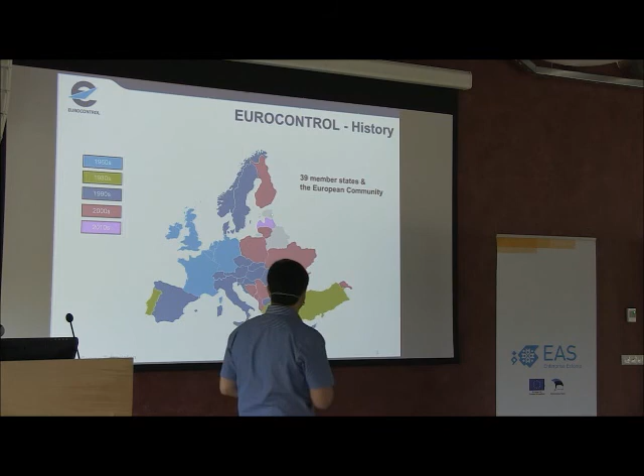Another picture to give you an idea about Eurocontrol: it's a civil-military organization whose objective is mainly to manage or build the European single sky. This was the main objective, but today Eurocontrol is doing more than that.

I wanted to show that we are not only concentrated on Europe, but also on pan-European relations, like with Turkey, Ukraine, and Norway. And again, I hope Estonia will join in the near future. The good news is that this month there is a discussion started between Eurocontrol and the Estonian government, so that Estonia also joins Eurocontrol.

As I said before, my task is to keep you awake for the next hour. We will start with a video showing the traffic in Europe, keeping in mind that this is a 2006 video, and that this is just one day's traffic. We will start at 2 in the morning, so this is the situation at 2am over Europe, and you will see that the traffic will increase to reach 30,000 flights during the day.

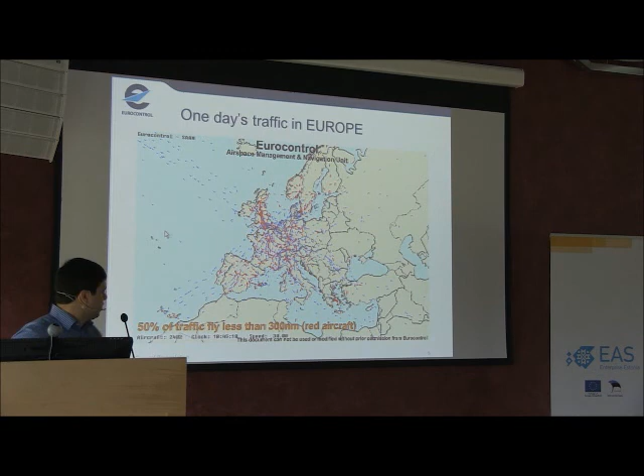We are almost at 8 at night, so the traffic will decrease, and we reached the peak at 3 in the afternoon.

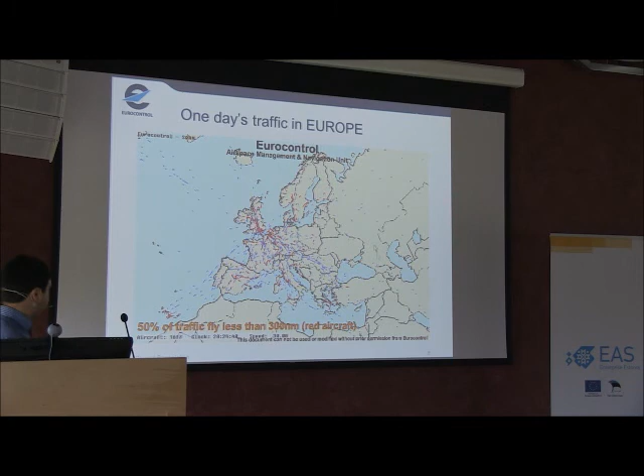As I have just said, the big challenge is that we think the traffic will double by 2030. So for capacity, there is a big challenge to handle the traffic. With the increase of traffic, we should keep safety as our main objective.

The third thing is that the environment is very important in all of this, and it's not only political - we should take into account the environment with the increase of traffic. We need to reduce the cost of air traffic in Europe. As many of you know, in Europe the cost is very high compared to our colleagues in the US.

And we have to work on the fragmentation of the airspace. I will come back to this point later on. With all of this, there is a big need for improving the technology and also the interoperability, because what we have today in Europe is that we have big manufacturers not talking to each other, and when an ANSP buys a system, sometimes they are obliged to buy a big system that cannot be connected to other systems because of the interoperability problem.

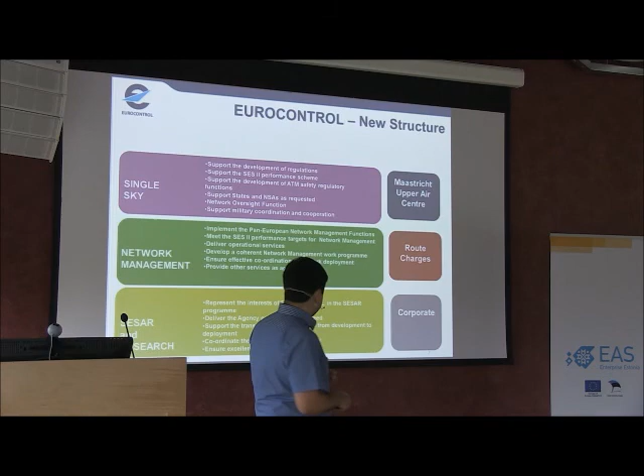So it's an interesting domain for investors in the industry to enter this sector.

How we are working with the European Commission and EASA: the European Commission and EASA are responsible for the regulation with the ANSPs, and we provide technical support and expertise for them as experts in air traffic management. The second role is the network management - maybe you heard about the CFMU and the regulations that we manage in Europe, this is the role of network management. And the third pillar is the research program, short, medium, and long-term research.

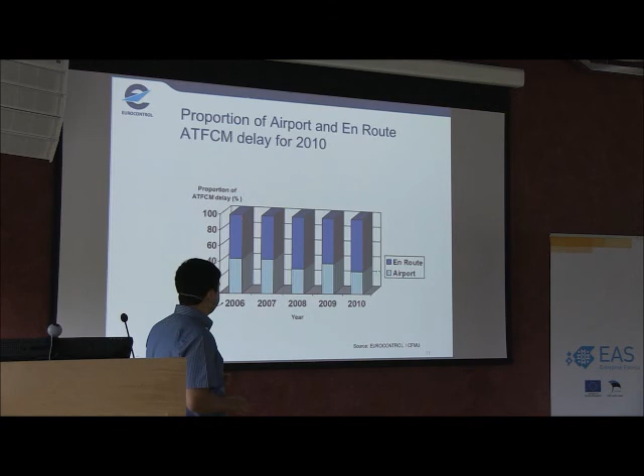If we go in depth and speak about the airport and its relation to the network, you can see from this slide that the airport generates a lot of delays. And when we speak about delays, we speak about loss of money for companies. This is the area where we should enhance our work, to decrease the delays in the airport.

Unfortunately, the main issue in delays is the weather. The weather is responsible for about 45% to 50% of the delays in airports. But new technology should allow us to work even in bad conditions, so there is an area where we can work a lot in terms of systems.

The capacity - there is a problem of the demand and what we can provide as a service. So the capacity of the airport is related also to the runway and the configuration. We cannot provide as many slots as we want, and there are other problems related to staffing, etc.

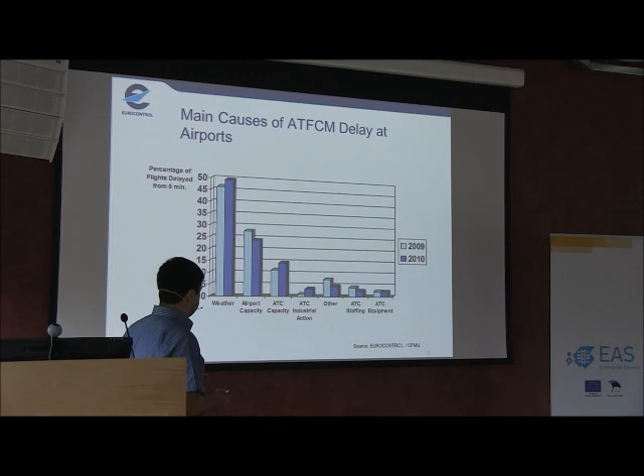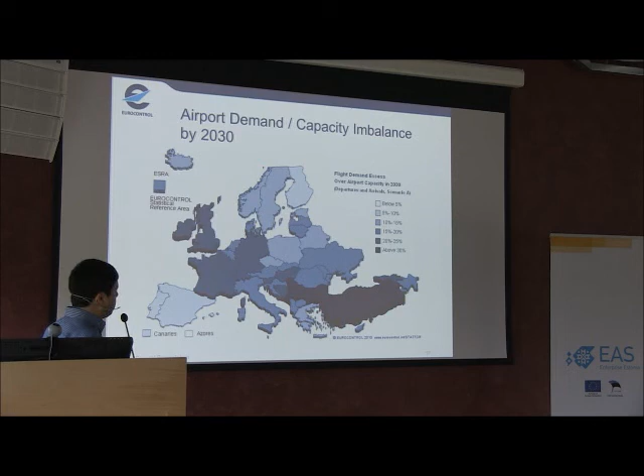I spoke about the capacity and the demand. Here is our forecast for 2030 about the demand. You can see that with the current configuration, we will not be able to handle all the demand for the traffic, especially in areas like Germany, France, England, Turkey, where the demand will be 30% above the capacity.

So what we did at Eurocontrol is analyze the different parameters. Where can we improve ourselves? Here is how we stated the problem.

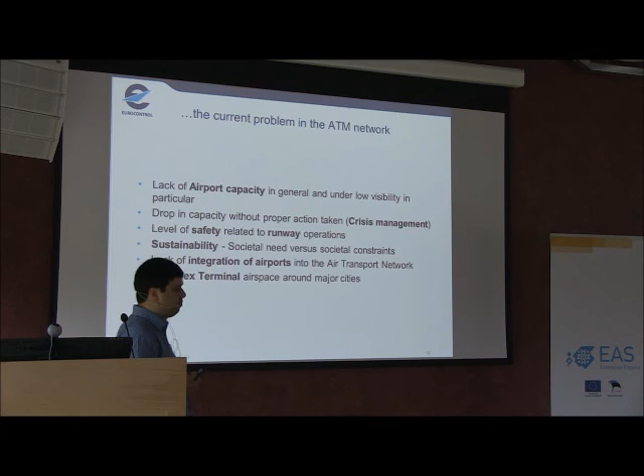We know that we have a lack of airport capacity, as I just shown before. We know that there are problems in crisis management, as you remember a few years ago with the volcanic ash. Some parts of Europe showed that there is no real crisis management procedure in some places. The level of safety related to runway operation, we should keep the safety very high. Sustainability related to societal need versus societal constraints.

This is one of the main problems that we have: the lack of integration of airport into the network. Because a few years ago, when you spoke about air traffic management, you spoke about approach, en route, but not about airport. The airport is like a black box. Aircraft arrive and depart from the airport, but it's not considered part of the network. This is also because the economic model for the airport is different from en route and approach.

And at the airport we have two contradictions: the company wants passengers to leave the airport very quickly to keep flights on time. At the same time, we have the airport people, who want to keep the passenger as long as they can so they buy things from the airport shops. So it's very difficult to have a balance between those two big actors.

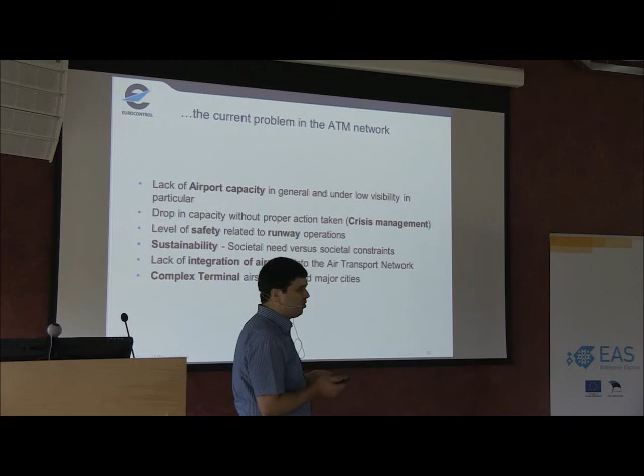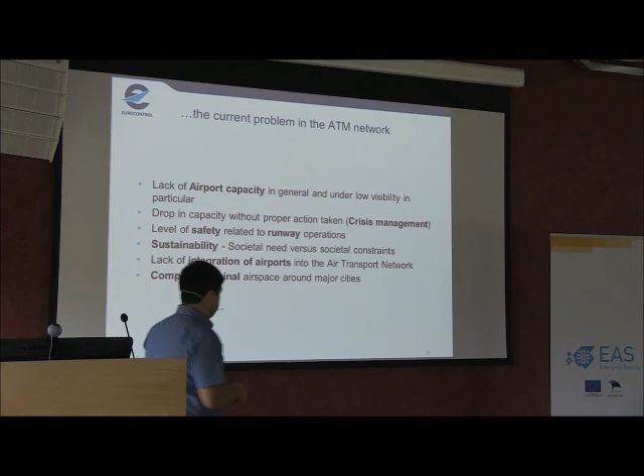And the last point is about the complexity of the airspace and its connection to the terminal. So you will see what we did at Eurocontrol to handle some of these points.

So for the organization, the first act is about planning. This is an area where not a lot has been done in recent years, and the concentration on collaborative planning is something really new. In Europe, there are just 3 airports which have real planning for the whole airport, and from those 3 airports, just 1 or 2 are really doing this work.

What I mean by collaborative airport planning is the fact that before the aircraft arrives at the airport, the ground handlers know that the aircraft will arrive. The controller knows when the aircraft will land, and this information should be shared between all the actors.

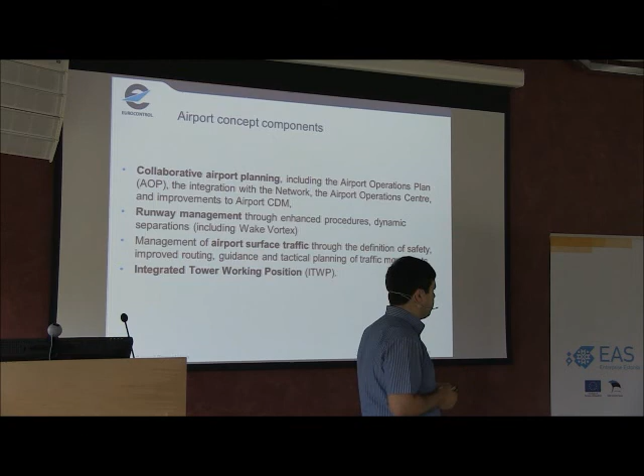Today, this collaborative work doesn't exist in all airports, and if it exists, it's not coherent at the European level. So our answer to this problem is what we call AOP, Airport Operations Plan, to integrate the airport into the network so we can all share the same information and improve the current collaborative decision making.

What I want with this presentation is to present the operational need, but also where the industry can intervene. In this particular point, for example, there are industrials trying to help operations put systems in place at airports to do this, but not in all airports in Europe.

There is Roissy Charles de Gaulle, Heathrow, Munich Airport, and Zurich. They have already done a lot of work on this, but all the other airports, it's in progress, or maybe not even started.

The second point is about runway management. I will speak a little bit about this problem, because today, if there is something where there are a lot of things to be done, it's in that area of runway management, to detect vortices, to help the controller know how to space the aircraft.

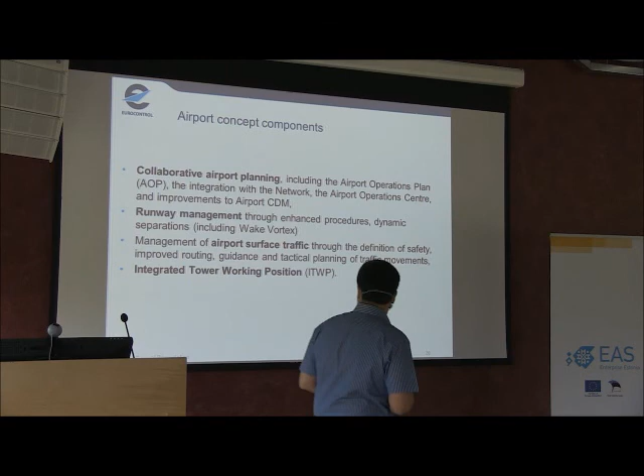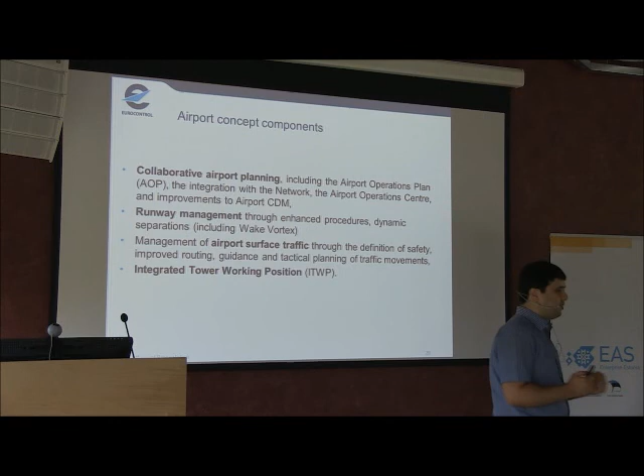The third point is surface management. What we provide to the controller in big airports today is a radar situation, so he sees the aircraft moving on the airport, but he cannot see what route the aircraft will follow, and he cannot compare what's planned with what's executed. So this is the current situation. I will speak a little bit about our proposal to improve this.

And finally, the integrated tower working position. I'll show some photos of new airports in Europe, how they are.

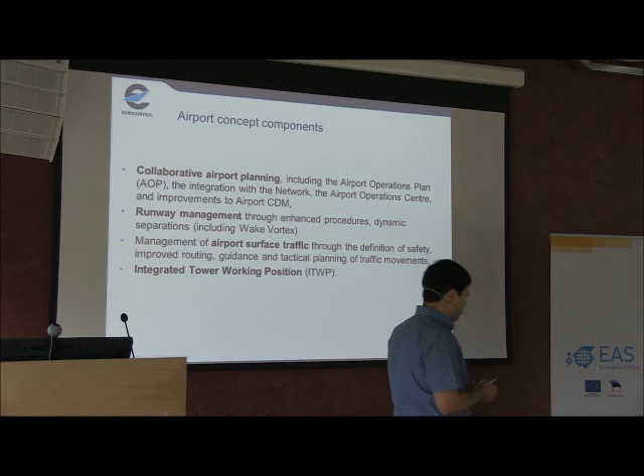So regarding the AOP, the airport plan, what we want, as I said, is to integrate the airport into the whole network. This starts with planification at the airport, which will be shared with the network, and then there is a mixture of all the information distributed to all the actors.

So what we are waiting for from the industrial side is to put systems in airports which enable the airport to share information. It can be easy to say, but it has a lot of impact on the airport because the complexity of each airport is different from the other. All the airports are not the same in Europe, and for each airport there is a specific case.

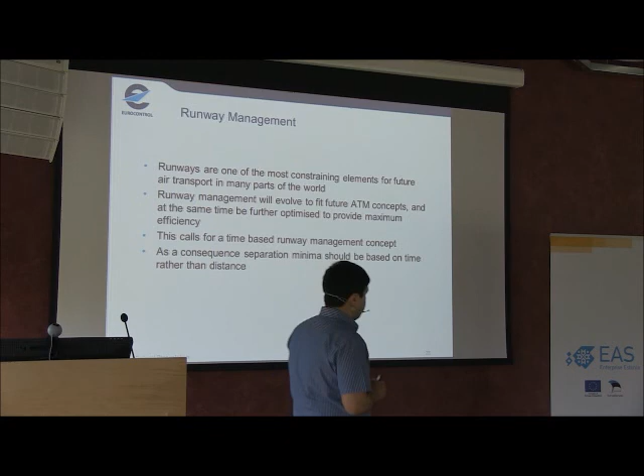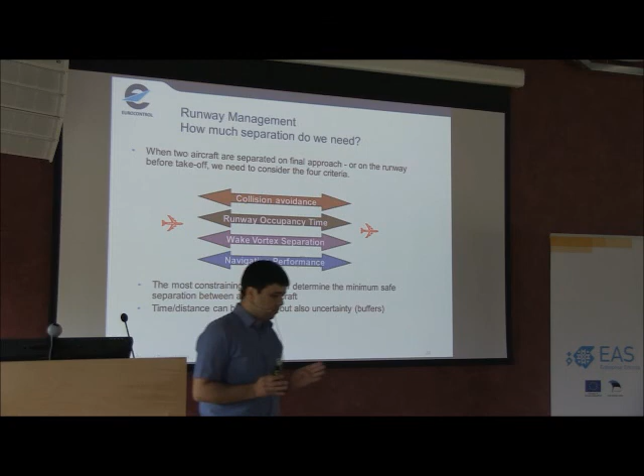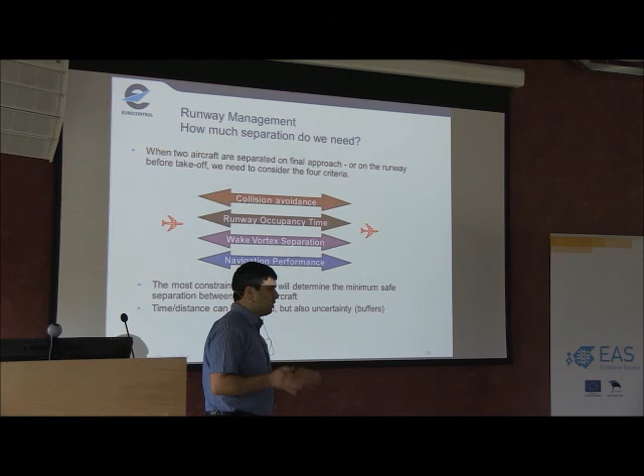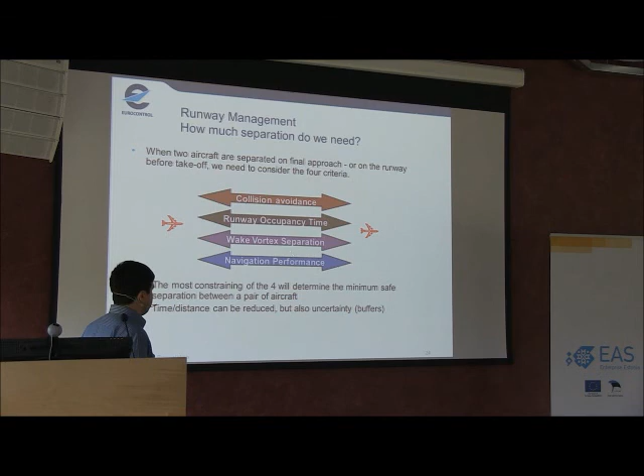Okay, for the runway, how are we managing the runway today. There are 4 criteria to take into account to compute how much distance should be kept between each aircraft, and the most constraining of the 4 criteria will determine the minimum safe distance to be kept. So the time distance can be reduced, but also the uncertainty buffers. And for each of those 4 criteria, we need some system to help the controller.

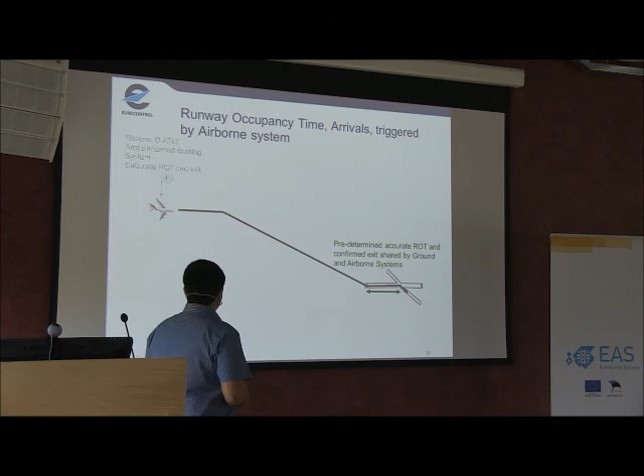I'll go to the next one to show you this. What we want to know today is how much the aircraft will occupy the runway, the time that will be spent on the runway, to synchronize the traffic. What we are proposing today is that the aircraft itself informs the controller about the time it will occupy the runway.

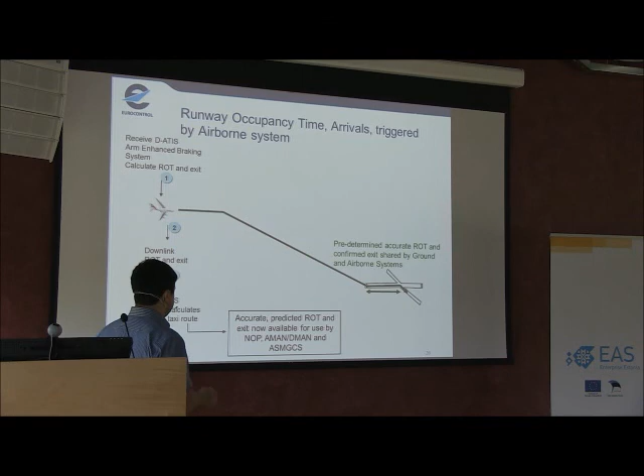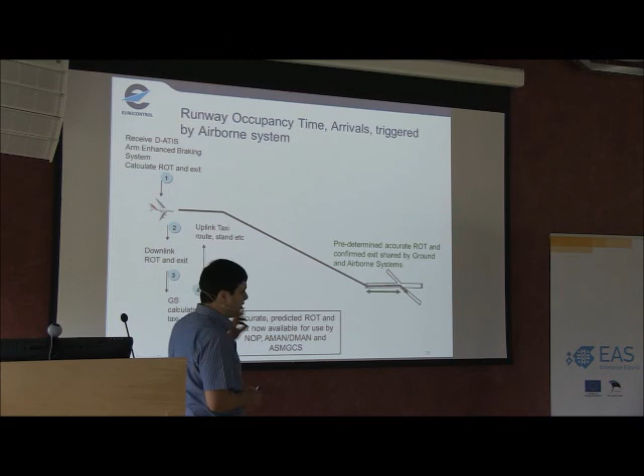Once the aircraft sends us this information via data link, the ground system computes the taxi routing. From this information, we can fix the route that the aircraft will follow on the airport, and the information is uplinked to the aircraft. Here, I'm not speaking about the system which exists. I'm speaking about what we think should be done in the future to be able to handle occupancy time on runways very, very efficiently.

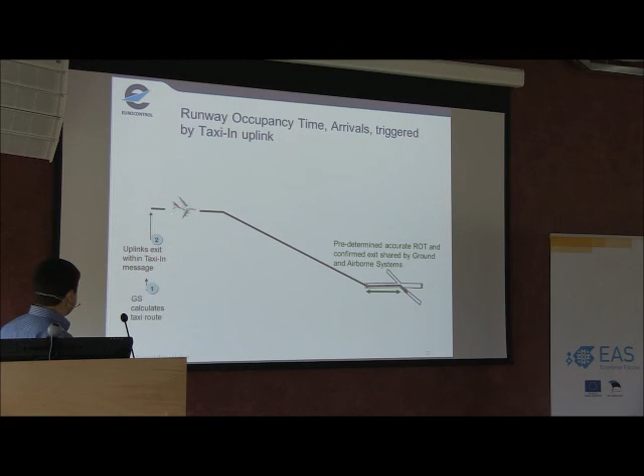I see that by this half hour, half of you is sleeping now. The second way is that we think we can compute the taxi routing on the ground, sending this via data link to the aircraft, which computes the occupancy time on the runway, sends us back the information about how much it will occupy the runway, and then we fix the sequence.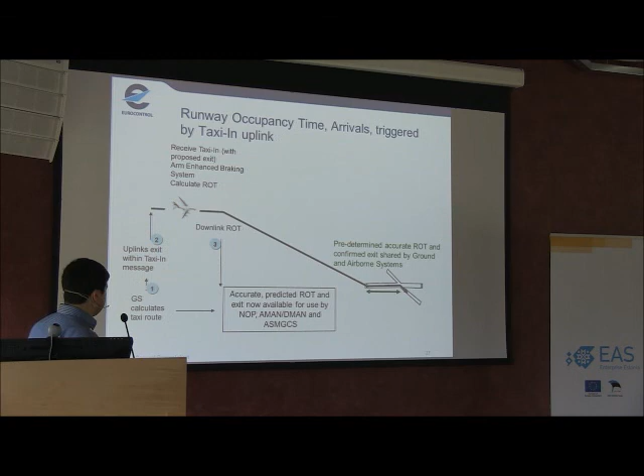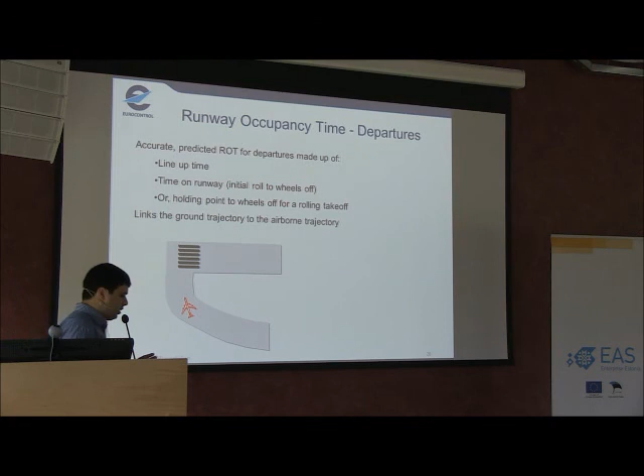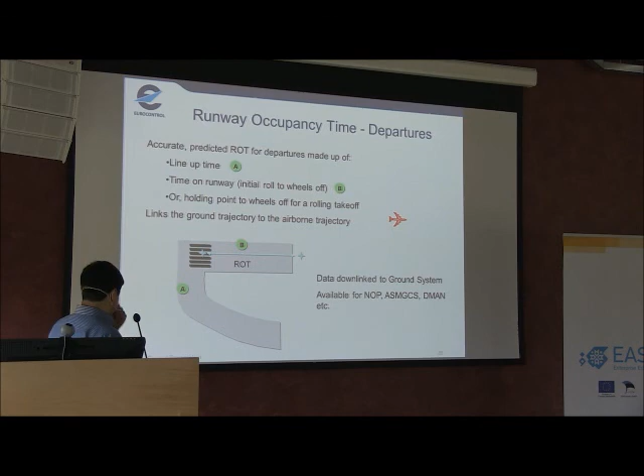As I'm speaking today, we can detect the vortices, but we cannot inform the controller of how much space he should keep between aircraft so that the second aircraft is kept safe. So the problem in this case is that we put a big buffer around the separation. We lose time on the occupancy of the runway, and of course when we lose time, we lose money. So this is also an area where a lot can be done, because today there is no way to inform the controller how much space he should keep between aircraft in this case.

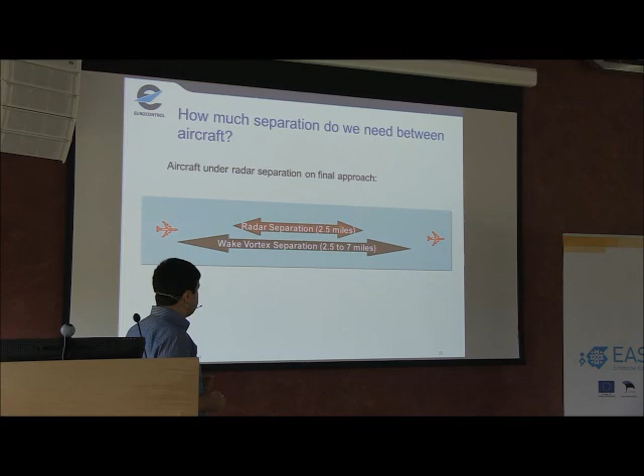So for radar, separation is 2.5 miles, but with wake vortices it can go up to 7 miles. The way forward, we are working on this problem of wake vortices, but what we are expecting from the industry is to provide the airport user, the controller, new tools that allow them to decrease the separation between aircraft. If there are wake vortices, we should not keep a big buffer, but the exact buffer needed to keep the second aircraft safe.

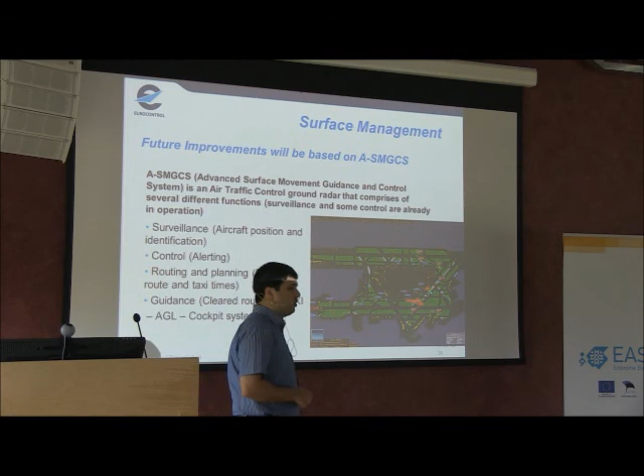In the domain of surface management, there are many other tools that can be developed also to help the controller. What we have today is just what we call ASMGCS, Advanced Surface Movement Guidance and Control System, which is just a radar picture of the situation. So what we are proposing to be developed in the future is the ability to provide the controller with the possibility to view the optimum route to the runway. A routing server is something we think will be very important in the future, and which doesn't exist today in a modern tower.

In this picture, what I'm showing is a mock-up that we are working on at Eurocontrol.

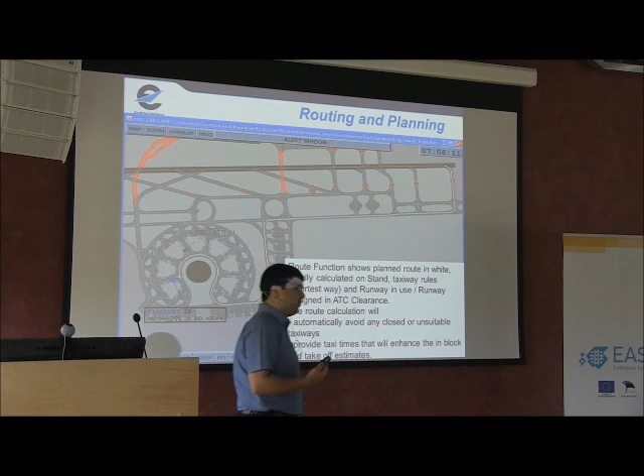This mock-up, the purpose is to show the idea, and then we think that the industry can take this idea, these mock-ups, to build the real systems. In this case, we show some proposal for the routing server.

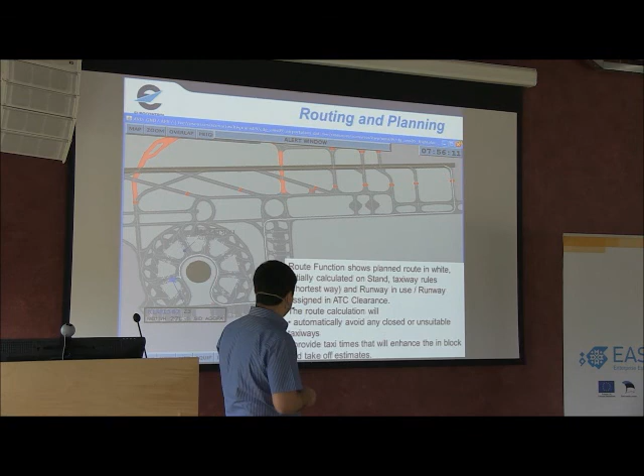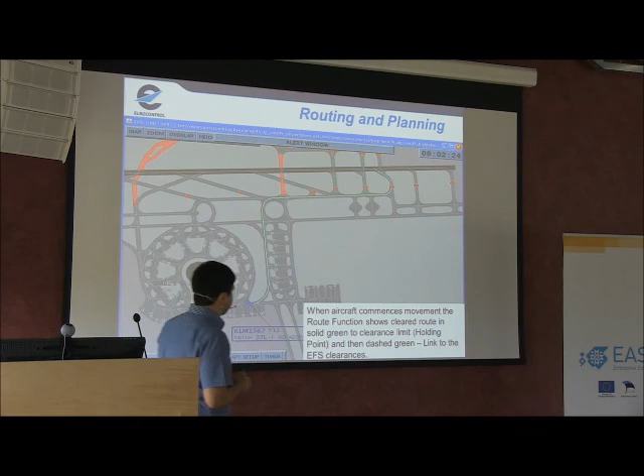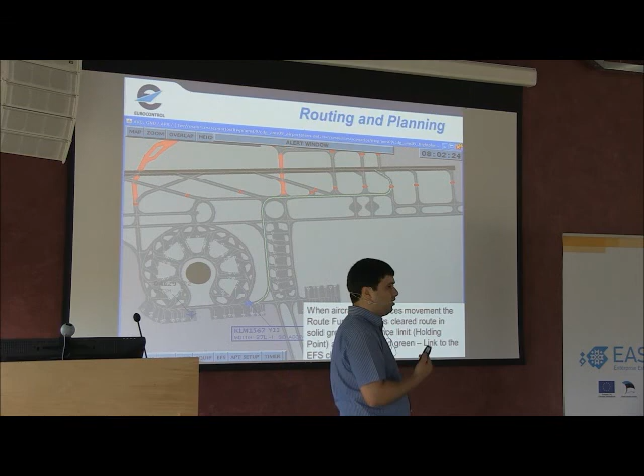This first picture is what the controller has planned in white, and in green it's what the controller has cleared, which is different from the first one. So the system can show to the controller the difference between what was planned and what he has cleared. You'll see why it's very important in terms of safety.

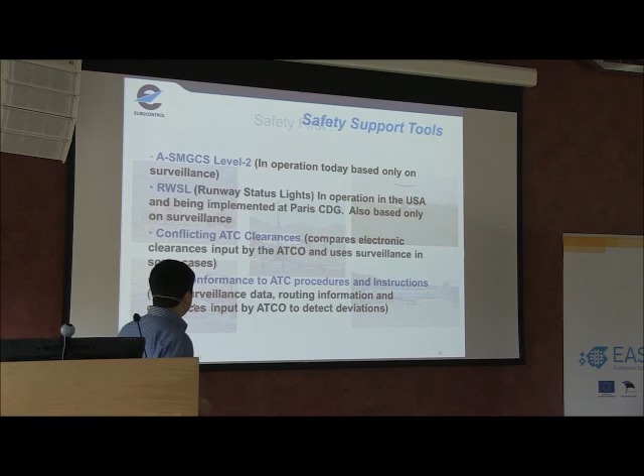This is more surprising because this is a taxi, so normally there should be no problem on taxiing, but the British Airways missed even the taxi. So what we did also is that we analyzed all the different situations that can bring us safety problems, and we addressed some proposals for enhancement of the safety tools that the controllers have today.

This A-SMGCS level 2 is in operation today, but we think that level 3 and level 4 should be implemented, taking into account new systems like the runway status light. This is a system that exists in the US. We started some tests in Roissy Charles de Gaulle, but not in all the other European airports.

This is the kind of system that will help the pilot know the status of the runway when he approaches, either from approach or when he's taxiing. So he sees the light in front of him. If it's red, he should not continue. Even if the controller gives him clearance to continue, he will check with the controller: are you sure it's red in front of me?

The third proposal is about conflicting ATC clearances. Today, the controller can give two opposite clearances, but nothing in front of him shows that there is a problem with his clearance. So he can give landing clearance for an aircraft and at the same time a cross-runway clearance. This happens very often, but the system today doesn't show him that he made a wrong clearance, or at least he should confirm that this is really what he wants to do.

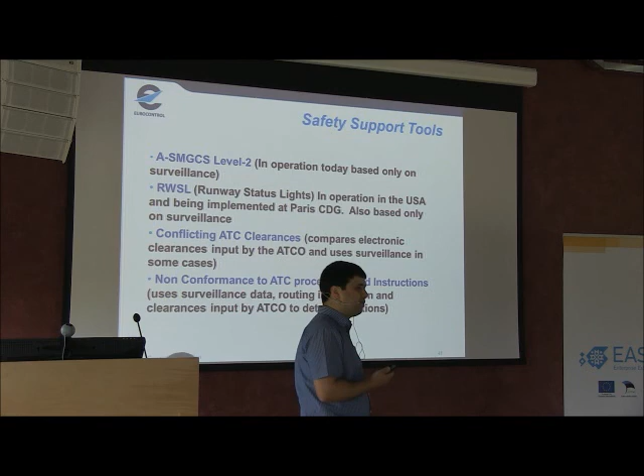So we analyzed all the clearances given by the controller, and we came up with a proposal for how the system should behave to help the controller on this. The fourth proposal is to help take into account the routing of the aircraft, to show the controller the non-conformance, either to ATC procedure—the pilot didn't respect the procedure—or to the instruction, the clearance. So here are some slides about what we are proposing as support tools to the controller.

Again, this is just a mock-up, it's not a system which is operational. This is what we are proposing for the community. What we are expecting is that the industry will take these ideas, develop them, build real systems, and then sell them to the towers, or to the ANSP, or to any organization responsible for the airport.

This is the example of the runway status light. Once KLM starts the takeoff, Crosshair sees the light red in front of him. Crosshair is lining up on this runway. He can see the red light, so he will never start his takeoff before this red light becomes green.

It can be surprising, but in this runway, in this configuration, we had 20 people die 10 years ago because such a system doesn't exist. What happened with the Spanish aircraft, it was on this Kilo 6. The controller asked him to line up, and there was another aircraft sitting here.

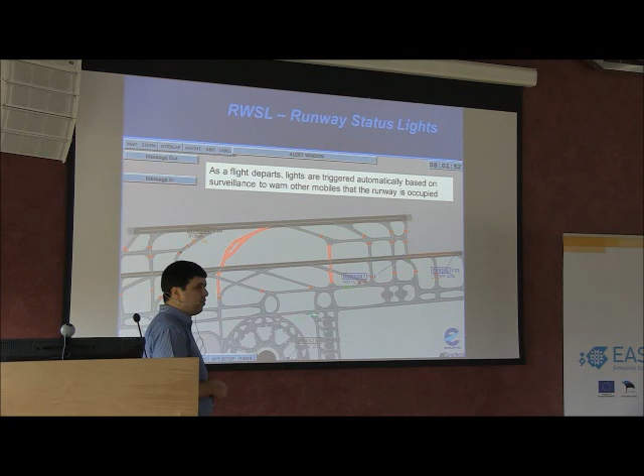The controller gave takeoff clearance. The guy here thought that the takeoff was for him, and the Spanish pilot thought the takeoff was for him. Then the big aircraft hit the small one on the runway in Roissy Charles de Gaulle. So based on problems like this, we analyzed what we need on the system side to help the controller.

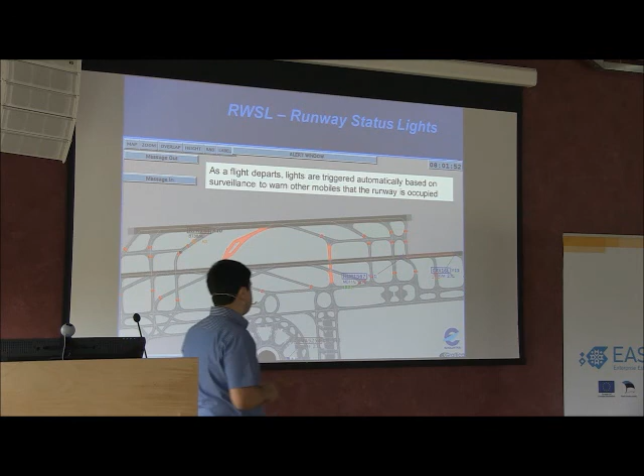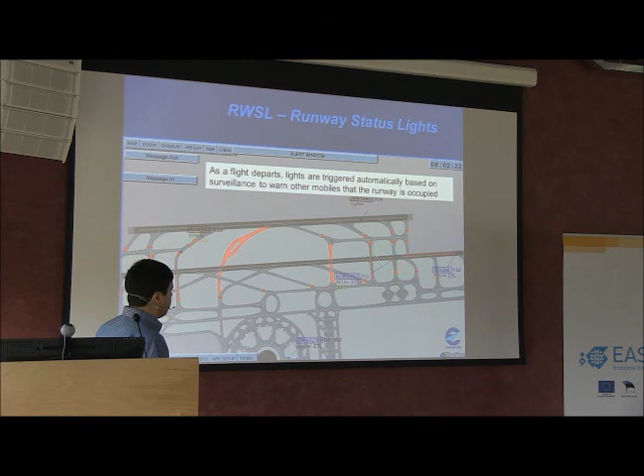Just 5 minutes left, so I'll go quickly. This is to show also the system of runway status light, so that we put red lights around the runway, so the aircraft will not enter.

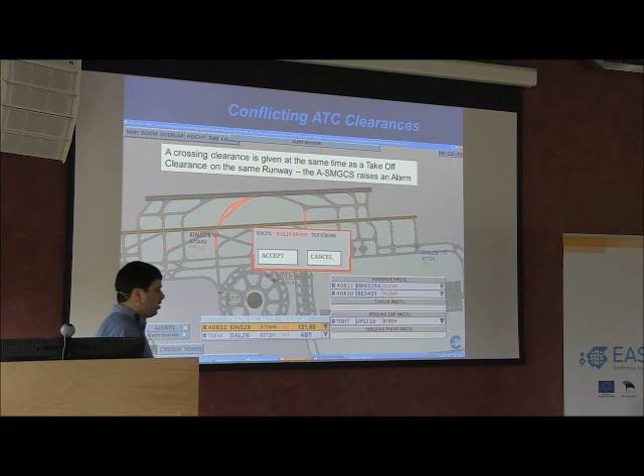This is an example of conflicting ATC clearance. The controller asks the Delta airline to take off on this runway, and at the same time there is a Shamrock aircraft crossing the runway. It can be seen as a safe situation, so he will accept this. But our role is to analyze that a takeoff clearance and a crossing at the same time should not normally be allowed. So the system asks the controller, are you really sure you want to do this, crossing and takeoff at the same time? And in this case he can say, okay, I accept this because it's safe.

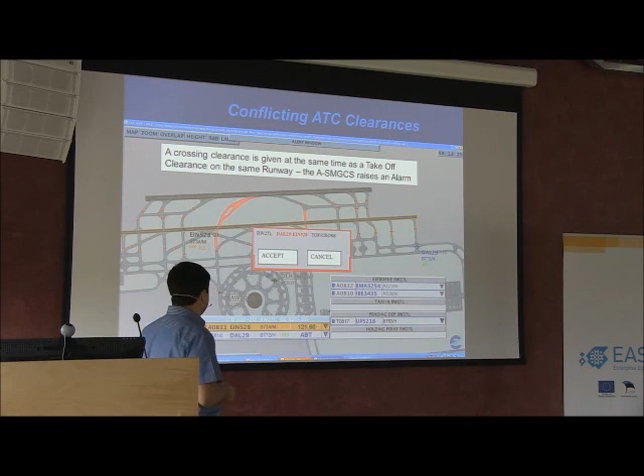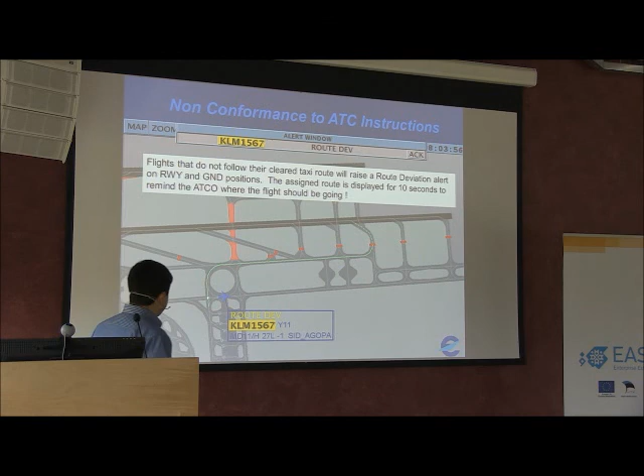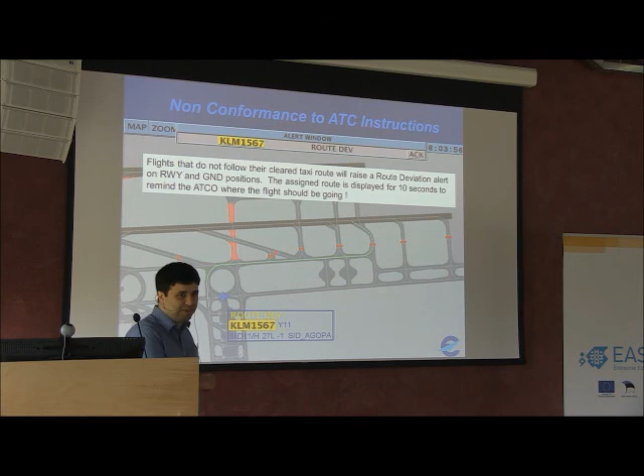The third example is non-conformance to ATC instruction. As shown before, the routing system displays to the controller the route that was cleared in green. The system detects that an aircraft is not respecting the clearance given. The KLM aircraft took the first turn to the right instead of continuing ahead, so we informed the controller of this route deviation. This aircraft didn't respect the clearance. It's really by chance that everything is KLM today, it's not intentional.

Another example is non-conformance to ATC procedure. Here we have a car which will enter the runway without a clearance.

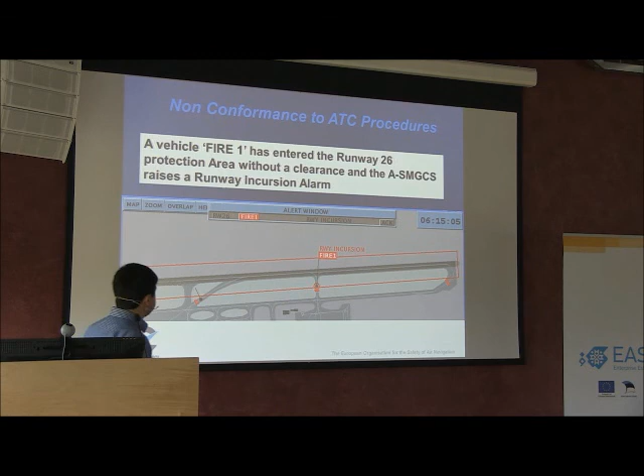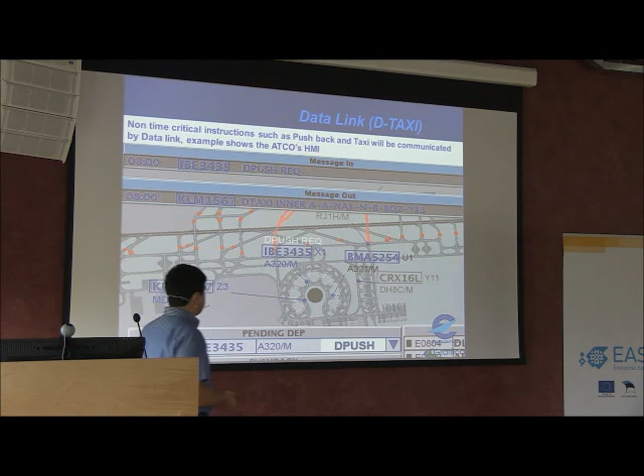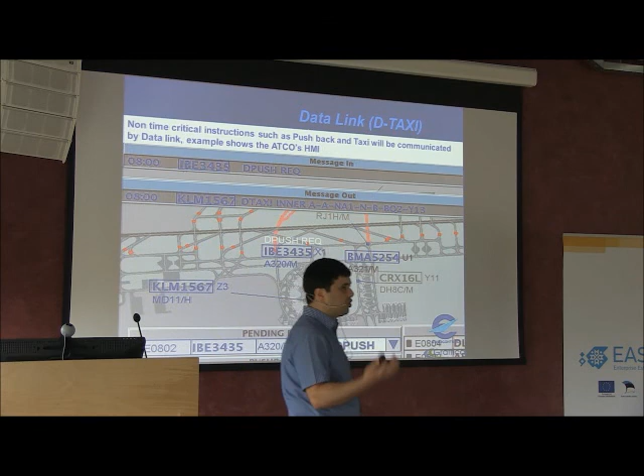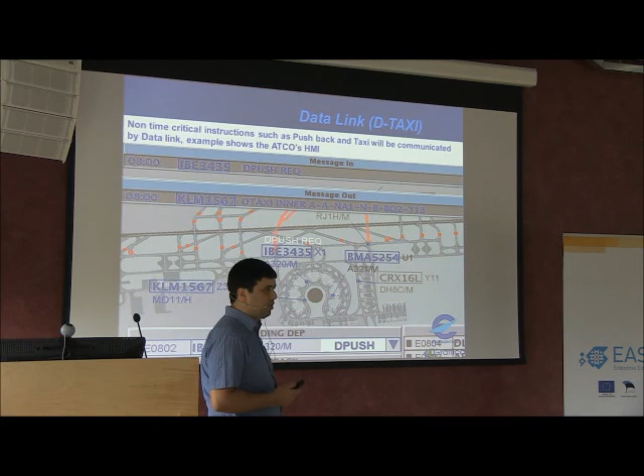Another system that will allow us in the future to improve situation awareness is the uplinking of the routing via data link. The controller can send something like an SMS to the aircraft with the complete route it should follow, which will avoid the problem of English speaking issues, like the pilot not understanding the route given. So we are working on this kind of mock-up to test usability with pilots from Airbus and other companies, and on the avionics side, they are also improving the avionics to receive these data link messages at the airport.

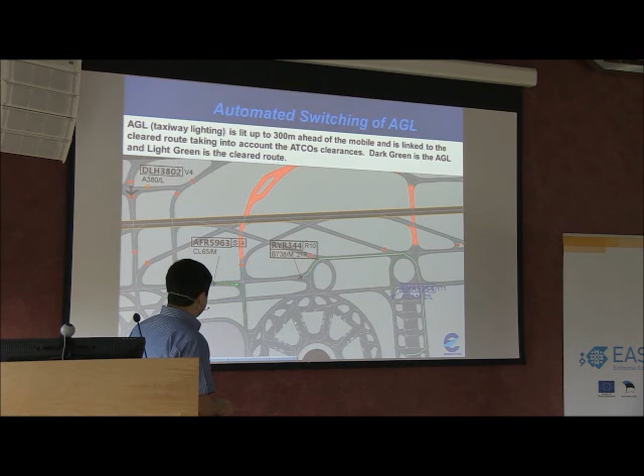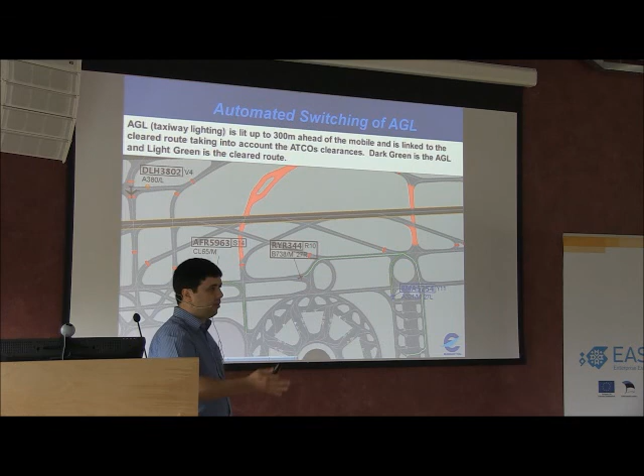Another system is to show green lights across the airport for the aircraft. This exists today but is not implemented in Europe. It asks the aircraft to follow the green lights. The controller clears the route, and in front of the aircraft there will be a green light showing him where he should go.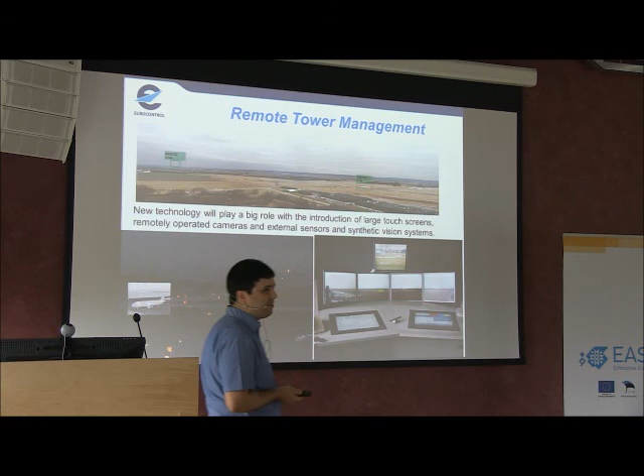Another case being investigated, especially for the north part of Europe, is remote tower control. With our colleagues in Norway, Sweden, and Finland, we are working on remote towers, so that with new systems, video, and enhanced visualization, we think it's possible in the future that the tower building we see today near the airport will not be needed anymore, because we can show the controller an even better visualization of what's happening at the airport. This is another project where technology is very, very important. Some controllers will not be very happy with what I'm saying, but this is a big discussion too.

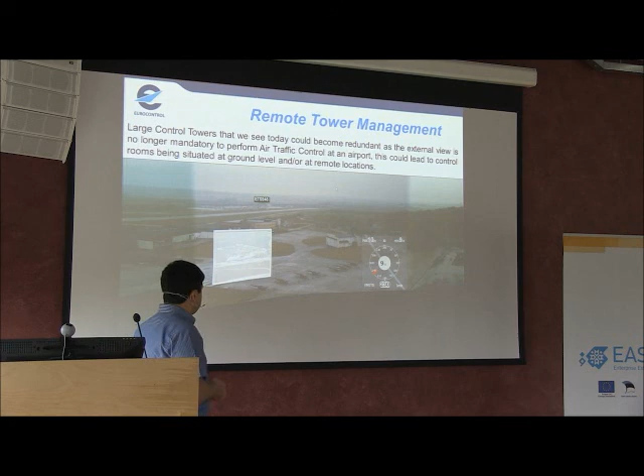Some photos of the Malmö tower remote tower prototype. This is again a prototype, not an operational system. In Malmö, they can visualize live the traffic at an airport in the north of Sweden, I think, and they can have an even enhanced visualization of what's happening at the airport.

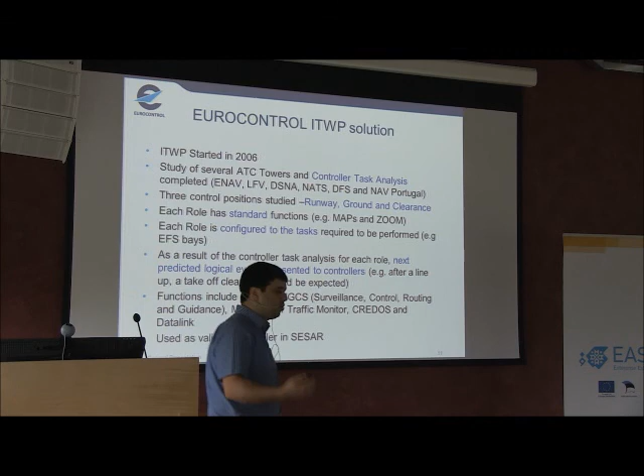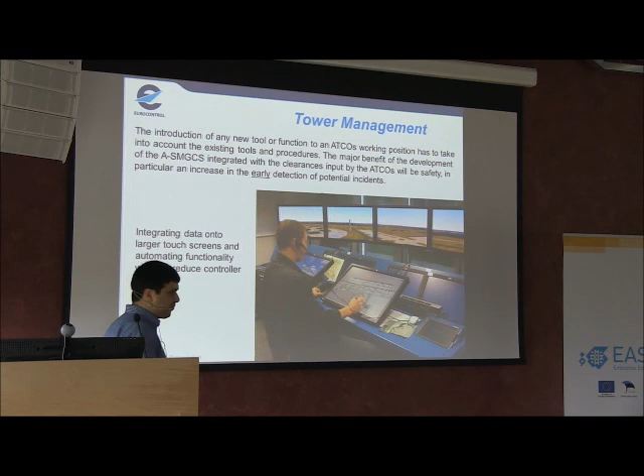With the information technology management and advancements we have, we think all those screens can be integrated together. So we made a proposal at Eurocontrol, and started the project in 2006 with 6 different ANSPs in Europe. We took the controller in the loop, they gave us their feedback, and we built a mock-up resulting in this screen. This is a colleague from England, and in just one screen we can integrate information that would otherwise need 4 or 5 screens. This is also an area where a lot of improvement can be done, which needs industry to work on, and we need to convince them that this is the future, not only building separate systems, but also trying to integrate systems together.

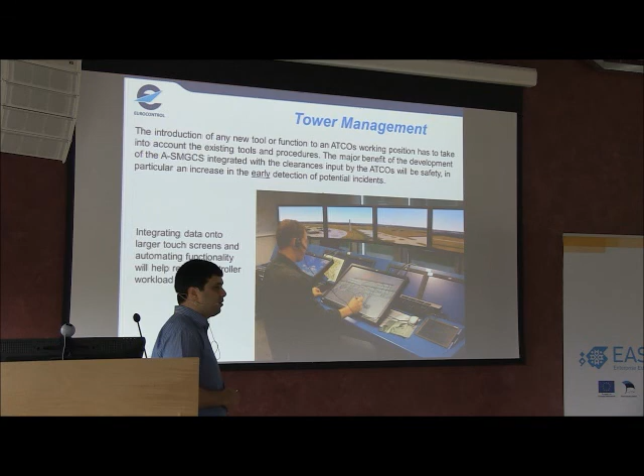Okay, quick word about SESAR. This is the program funded by the European Commission and Eurocontrol. The idea is to have a research program in which we handle all those issues. The goal of SESAR is to handle 3 times more traffic than the 2006 figure, and to improve safety by a factor of 10.

I cannot really answer what a factor of 10 in safety means, it's very difficult to see. With the increase of traffic, we need to reduce the environmental impact by 10% and decrease the cost by 50%. These are the 4 main objectives of SESAR.

So the European Commission and Eurocontrol funded this SESAR program, putting 700 million euro each, and the industry, the founding members, also participated with 700 million. So with a budget of 2.1 billion euro, we are running a program that should stop in 2016, to propose to the industry what the systems of the future are.

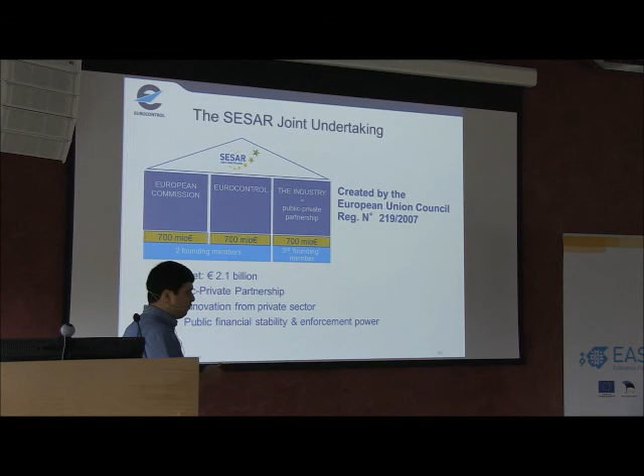So for any industry interested in what can be done in Europe in the future, this is a very interesting program to look at. In this program, many actors are involved: staff associations, airborne industry, etc.

The time is finished, so I will stop here, but I'll give you just one slide about the system view, which can be interesting for you.